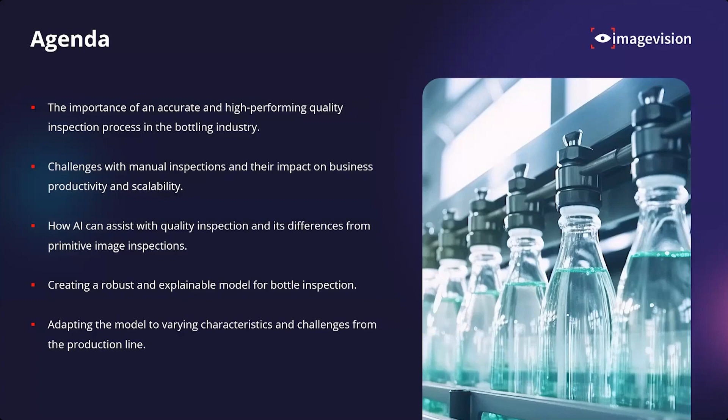Now we have come to the part of the webinar where I'll be introducing our speakers for the day. So we have our first speaker, Renu Sharma, who spearheads product innovation as Vice President for ImageVision.ai. With over 20 plus years of experience in developing tailored industry-leading artificial intelligence and machine learning solutions in computer vision and analytics, he has been closely working with customers and organizations, helping them with their digital transformation journey.

Next up, we have Bhavika Patel, who works as a lead data science engineer at ImageVision.ai. She's a statistics graduate with over 10 plus years of work experience and has hands-on experience in statistical data analysis, statistical modeling, machine learning, deep learning, and computer vision. I will now hand over the stage to Renu. Renu, please take it ahead from here.

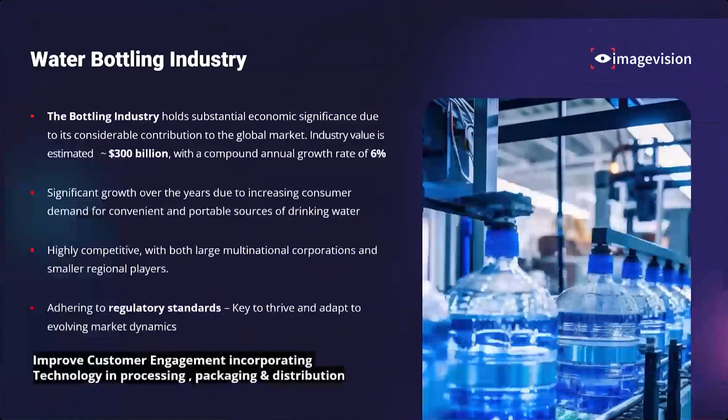Okay, thank you, Aditi, for the introduction and for setting up the expectation for the session. I once again welcome all our audience to this session, and upfront thanks for taking out your time and showing interest with this webinar. Let's begin with a quick overview about the bottling industry before we do a deep dive discussion on each of the specific formats.

If you see the bottling industry over the years, there has been substantial growth, as Aditi was briefing it, and the market value growth is really significant. This industry is expected to be growing much higher with more customer demand for bottling. There are many reasons for this, including increasing health consciousness among consumers and demand for potable drinking water, and the rise in the middle class has contributed to this growth.

When there is demand, market opportunities exist, and they vary with the region. In developed markets, the industry focus is on premium and functional waters. In developing markets, the opportunities are for basic and premier offerings.

The bottling industry is highly competitive with multi-level players in the market, and sustaining in this industry becomes a major challenge with the competition. Companies adopt various innovative approaches to differentiate their product from the competition and make a mark. That could be many ways - maybe focusing on packaging, coming up with innovative ideas for how the content is packed and inspected, bringing in different flavors, minerals, etc.

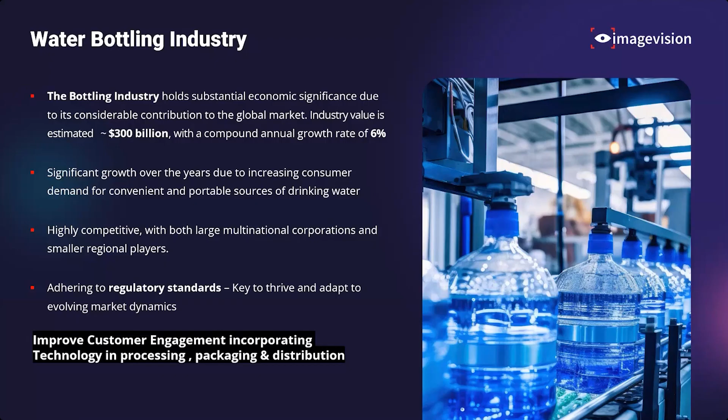Back to the topic - I want to talk about the technology landscape where it helps with the bottling industry. Before we get into the specifics of the bottling industry, we would like to quickly touch upon the opportunities for improvement with respect to applying technology at various stages of the production line.

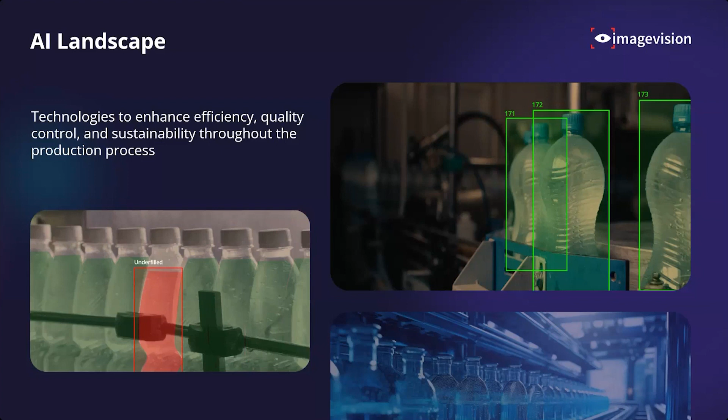Inspection is what we primarily focus on, where we could bring much quality improvement and cost savings. Now, when you talk about inspection, the first thing that comes to mind is the bottle inspection stations. The objective is to ensure that the integrity and quality of bottles are ensured before they are filled.

This is applicable for empty bottles. What are the defects you see here? It will be cracks, chips, or any physical defects that can get into the bottle. So applying computer vision with different sensors can enhance the quality of inspection in bottle inspection stations. This is one of the things we can think about when we talk about the bottling industry.

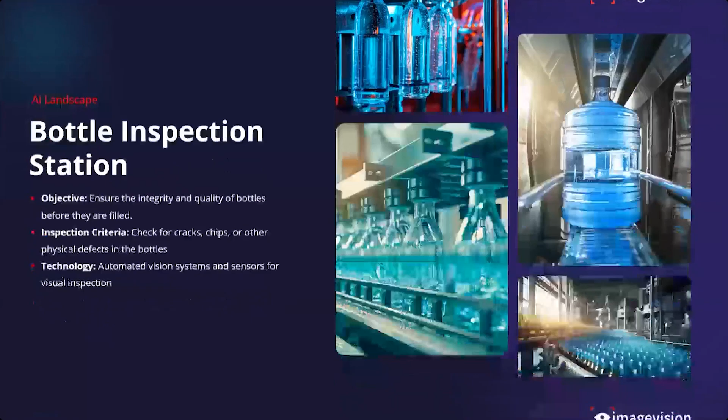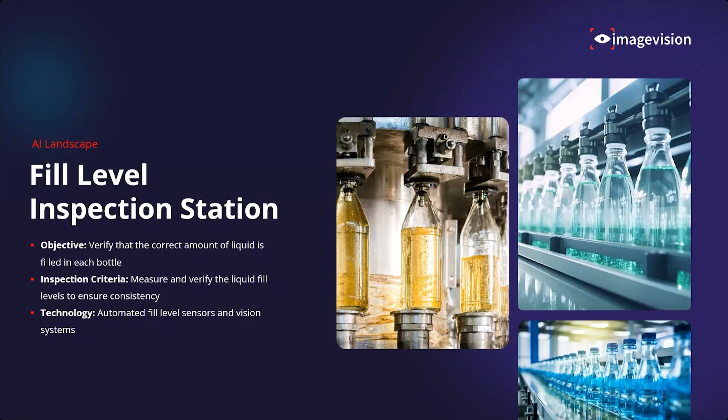The next one that comes to mind is fill level inspection. The objective for this inspection technology is to ensure the right amount of liquid is filled in each bottle. This has become a major concern where, when there are leaks or malfunctioning in the filling system, the bottle doesn't get filled correctly, and that becomes a big issue with quality. So we have visual as well as other sensor systems which can be used to check the fill level, alert, and reject the bottles at the production line.

Next is label inspection - again part of the bottling industry. Once the bottles are filled, the label printing system will print the labels onto the bottle and seal the caps. There are many defects which can occur, which if not noticed or corrected well, have a high impact with respect to delivering to consumers. So we use various modeling techniques as well as OCR and other reading tools to make sure the label is printed fine, aligned correctly, and visible to consumers.

In that way, we are making sure that the integrity of the bottle which is packed is correct before it leaves the production line.

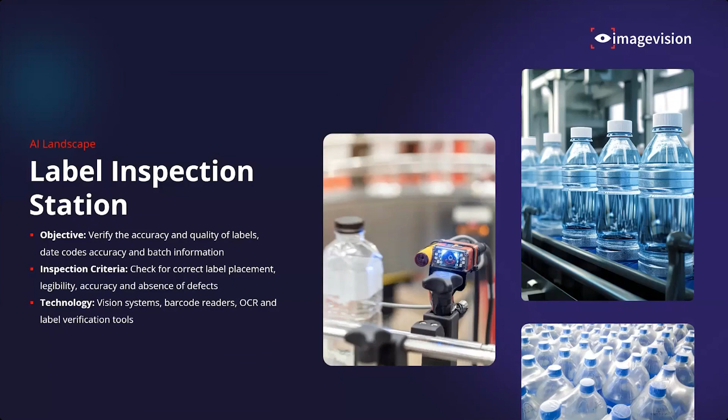Packaging and carton inspection is another area where we'll employ computer vision and AI inspection techniques. When bottles are packed in cartons, the counts are checked and verified. The seals, whether the package is actually correctly sealed or not, is verified. The packages are even classified according to size and shape so they can be diverted to the right conveyor production lines. Here we use weight sensors, barcode readers, thermal sensors to check if the packaging is done through thermal imaging. Cameras are used for that, and the vision system classifies and counts the bottles.

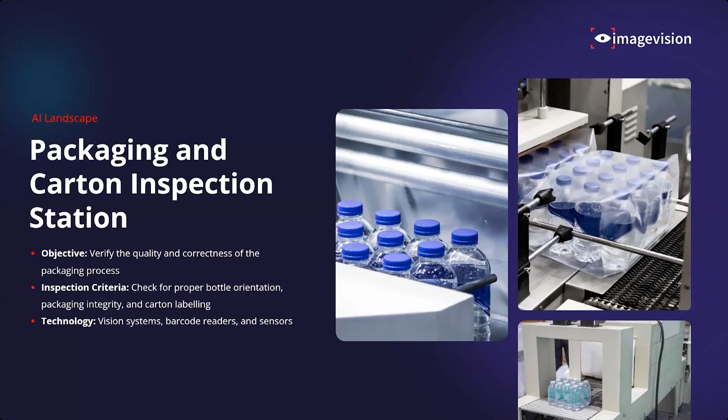Moving on, leak detection system is another area where we can apply vision techniques based on the place at which we are performing the detection. Leak detection can be applied for empty bottles as well as for filled bottles. The technology used for detecting leaks in empty bottles will be different from the technology used for detecting leaks in filled bottles.

In normal cases, it cannot be done only with vision, because cracks can be deceiving sometimes. Whenever there are hairline cracks or scratches, the vision system can get fooled, so false predictions can happen. So we combine the vision system along with other leak detection techniques like pressure sensors and water sensors to make sure the leak is detected before the bottle leaves the production line.

The next prominent one which we see and deploy in the bottling industry using modeling is the cap inspection system. Before the filled bottle leaves the production line, we need to ensure that the caps are fitted tight without any chance of the content leaking. The labels are printed correctly and the alignments are straight so it is intact for the production line. Here also we use computer vision and different sensors to ensure defects are detected upfront and don't reach the consumers.

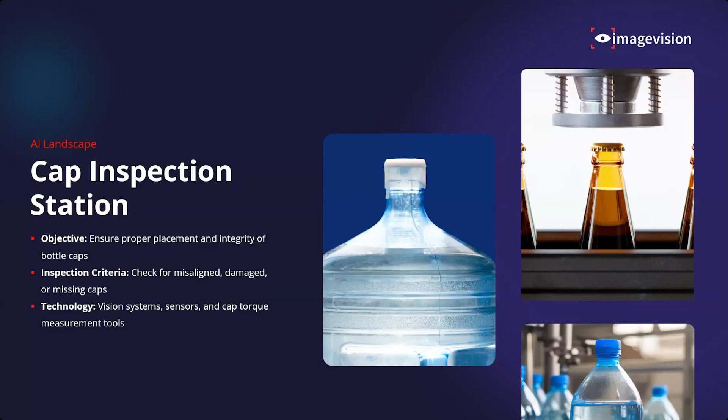Next, there are many inspection systems as we've discussed here, and we also consolidate all these models we've described in the previous session into a final inspection system where the integrity of the filled bottle is checked. It could check the bottle type, the size of the bottle, the alignment of the bottle, the cap alignment, whether labels are printed, barcodes are printed, and if the expiry date is right or not. So all these things can be integrated into one single model and delivered to the customer.

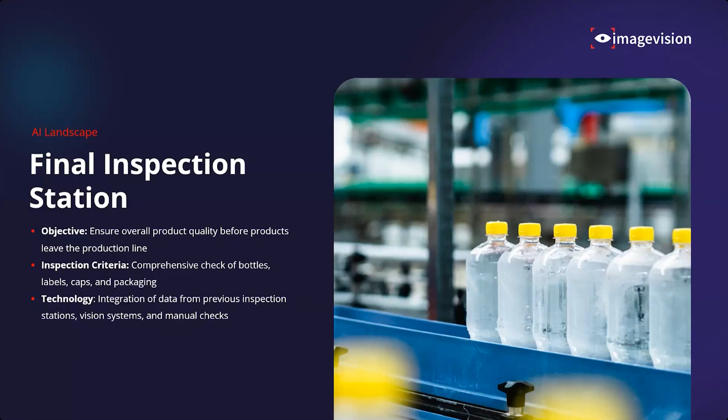So I just quickly went through some of the technology advantages and some of the use cases which are applicable in this particular bottling industry. There may be many more like this which can be used and implemented as part of the inspection.

Introducing AI on a high level helps us deal with the dynamicity of defects, which is very common in this industry, because we cannot predict what defects you may encounter in a bottle which is coming into the filling system.

Now, when implementing a visual AI inspection as part of the bottling industry, what is the key voice of the customer which comes out from the industry? Each customer will have a unique challenge and requirement while trying to automate their manual inspection process. A detailed system study should be performed first. The floor plan has to be analyzed to understand the right fitness of the visual inspection solution.

With that, I will move forward and request Bhavika to take over and talk about a few of the challenges and internal details of how this bottling inspection system works with AI. Over to you, Bhavika.

Thank you, Grinu, for the elaborate introduction of our AI vision inspection system. Coming back to the challenges in the bottling industry, as just introduced, inspection can be done at different stages in the production line. When it comes to the bottle inspection system, there are 4 major stages: pre-wash station, after washing of the bottle, pre-filling the bottle, and post-filling station.

The most crucial stage out of all is inspecting at a station before filling the bottles. The main problem we come across in this pre-filling process is finding foreign particles inside the bottles, like tiny bits of glass, plastic, or even bugs or rodents. These contaminants not only pose a severe threat to consumer health, but also can cause damage to the bottling machines. Many in this industry currently rely on manual inspection, which is time consuming and labor intensive.

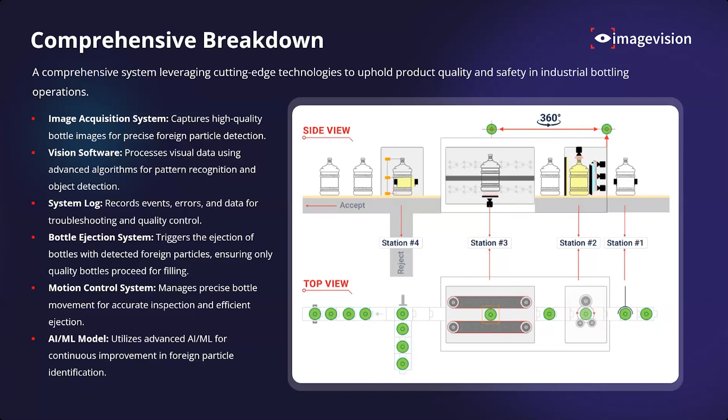So let's see what is required to train an algorithm.

So usually when we train an AI model, the first and foremost step is data collection. When we try to collect the data, we try to collect diverse data through the cameras, which will be a foundation for our AI model.

To enhance the quality of the data collected for effective model training, we apply a few pre-processing steps such as normalization, resizing, noise reduction, and enhancing its brightness or clarity of the image.

Next step, once we enhance the data, we try to extract its learning features. When we say learning features, we mean how the defect is, its edges, its colors, its shapes, its textures. So a few of these features will be fed to our deep learning architecture to build a prediction model to understand the context of that defect.

So the key takeaways - this is something I just want to mention. Primarily, the advantage is to enhance or bring to the notice of the participants, finally, what is the key takeaway with respect to installing the system?

First and foremost, getting rid of the manual inspection system. When you introduce automation, it helps the client address the misses which can be caused due to human error. The human error can be due to fatigue, inattention, inconsistency in decision making, but sometimes the understanding of a defect varies from person to person. Whenever the shift changes, the standard also changes. So a defect for one person may not be a defect for a second person who comes as a supervisor in the next shift. We are seeing those types of things happening in the production line.

Then there's the speed at which inspections are made. Speed plays a major role whenever scalability is required with respect to production throughput. The manual inspection becomes a bottleneck. When you want to increase the speed of the line, you have two options: include more resources, more inspection stations, and have more capable people who can actually run at a higher rate to detect the bottles.

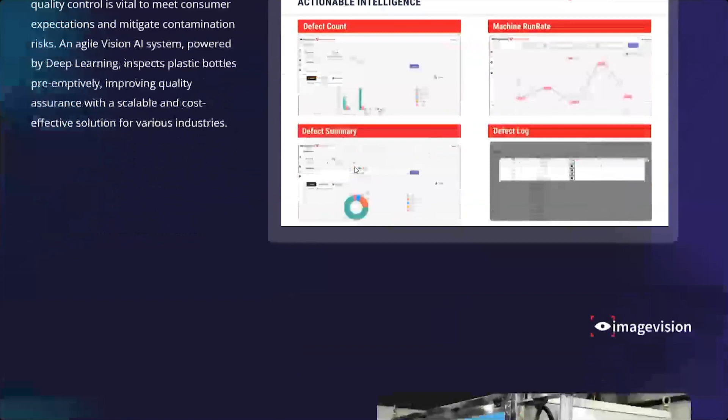Thank you so much, Greenu and Bhavika. I think that was a very insightful session which helped us understand surface defect detection for bottling. We had a deep dive into the entire process, into how we are able to establish a system for the bottling industries, how it is scalable, and how it can help the bottling business ace their customer satisfaction. As mentioned earlier, we received quite a few questions during the session, and the floor is now open for questions and answers.

I'll take up the first question that came up very early in the presentation. Just give me a second. This question is by Haley, who wants to ask: what's the lead time to deliver a bottle inspection system? Greenu and Bhavika, would either of you like to take up this question?

Yes, Aditi. I'll take it up primarily, and Bhavika, if you can add your thoughts, that will be great. So primarily the lead time for installing the system - as I was mentioning in my earlier presentation, you probably don't get any off-the-shelf product because this is primarily dependent on a customer-by-customer basis, since requirements vary, and we need to define and design the system for specific customer needs. But for both the model and the hardware, we really make sure the footprint is minimum, so we don't have to build every system from scratch. Having said that, the minimum lead time can be around 3 to 4 months to get a full-fledged AI-enabled inspection system installed, piloted, and running in your production line. Hope I answered your question.